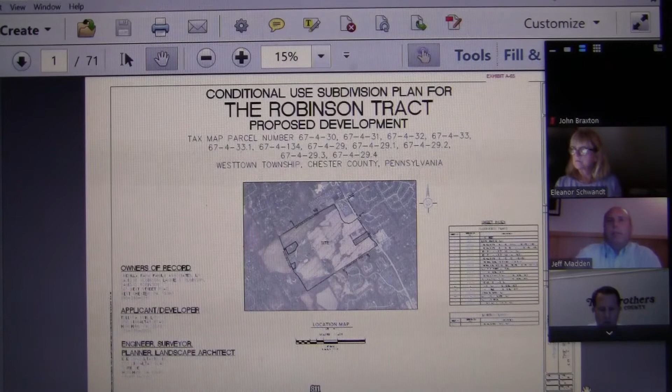Did you also prepare the conditional use application that was submitted with the prior Crebilly farm application? I believe it was marked Exhibit A6. Yes, I did. And that's what's being depicted on the screen at this moment, is that correct? That is correct. Generally, how is the plan now marked as Exhibit A65 different than the prior conditional use site plan A6? The new site plan labeled Exhibit A65 moved one of the site entrances off of 926 to line up with the intersection of Bridlewood Boulevard.

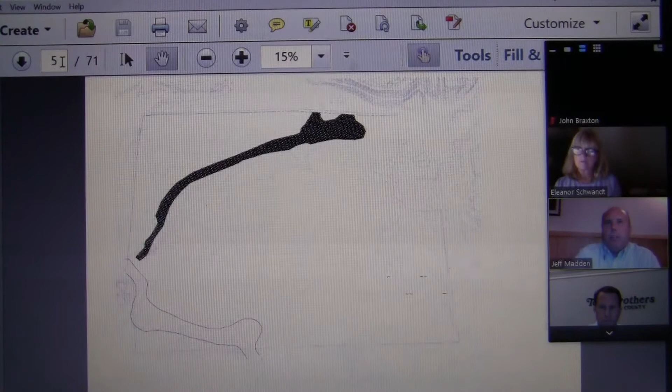It eliminated the right in, right out along 202. The mix was slightly changed. There was previously 117 townhomes, now there's 135. There was previously 127 side entry singles, now there's 118. And there was previously 73 front entry singles, now there's 64. The open space...

...is roughly the same, around 197 acres. There are fewer homes on the westernmost portion of the development property than there was previously. We shifted everything to the right a little bit. One of the major changes was the addition of the collector road, and there is an additional trail located next to the collector road.

Okay, and when you say collector road, where is the road connecting from what road to what road? Sure, it's the spine road that's connecting West Pleasant Grove Road at the top to Street Road at the bottom. Okay, so north to south? Is that correct? That's correct.

Okay, and just generally, again, to refresh everyone's recollection and for the record, where's the property located? It's in the general intersection of the following roads: 202, 926, Street Road, and West Pleasant Grove Road. Okay, and how is the property zoned? The property is zoned AC and R1. And I believe you may have stated this previously, but what's the total approximate acreage of the property? The approximate acreage is 322 acres.

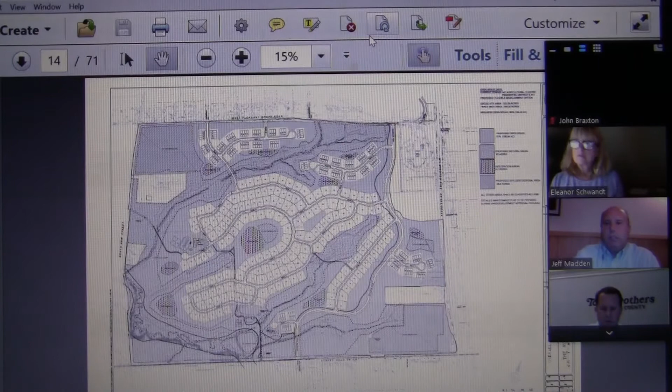Okay, and just some preliminary housekeeping items. I'd like to show you what was previously marked as Exhibit A4, which are the deeds for the property. Take us a moment to pull them up.

And who are the legal owners of the subject property? The Robinson family and related entities. Okay, and I'd like to show you what I've marked as Exhibit A5, or previously marked as Exhibit A5, which is a redacted copy of the agreement of sale for the property.

Is there a question there? Just waiting for it to load. Waiting for the exhibit to load. If you could Sorry. take a moment, please. Sorry. There we go. There it is.

And is Toll purchasing the entire development property? Yes, they are. And what use is Toll proposing to develop on the subject property? Flexible development. And is that flexible development permitted in the AC and R1 zoning districts? Yes, it is by conditional use.

And what is the design process under the ordinance that's required for a flexible development? It's under the conservation design, which is section 170-16-17 of the zoning ordinance. And does that design process require an initial existing natural resources and site analysis? Yes, it does.

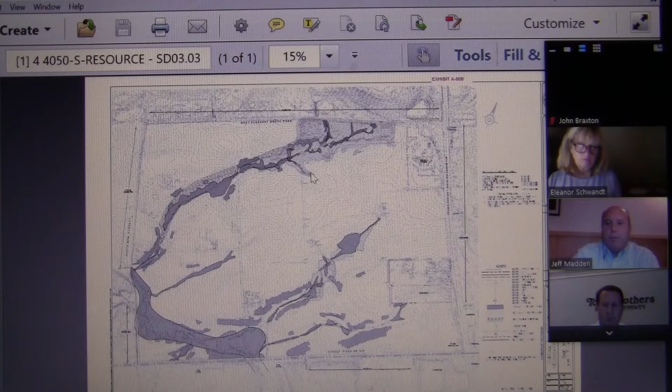I'd like to show you what I've marked as Exhibit A67, which is the potential development area plan sheet from the conditional use plan set. Please explain to the board how the potential development areas are determined.

Sure. The areas shown, which is on plan sheet 9 of the plan set, the brick pattern, which is prominent on this plan, shows the areas that are exclusive of the primary and secondary resources, and that would be the area with the potential development of the area.

They do not include any primary conservation areas, except minor intrusions for land development purposes and otherwise permitted by the Commonwealth, such as road crossings, which we do have in a few locations. We also minimize the intrusion into secondary conservation areas, so there's no more than 50% of the secondary conservation areas, except if modified by the Board of Supervisors.

Okay, and again, what were the intrusions permitted into the primary conservation areas? The primary conservation area intrusions are the road crossings at the site. There's one in the upper left-hand corner that goes across the stream, and another one right across from Bridlewood Boulevard, which would also go across a stream and some slopes.

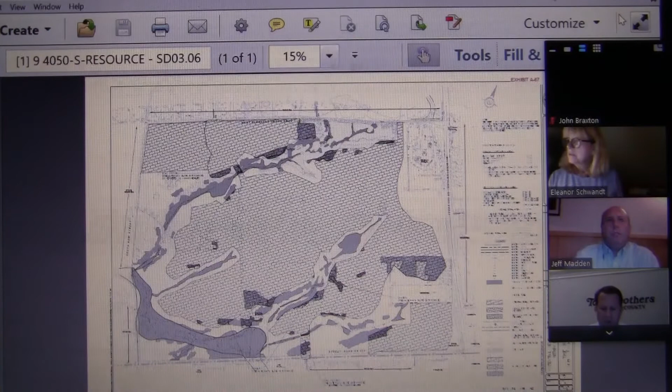I'd like to show you what I've marked as Exhibit A68, which is the overall site plan sheet from the conditional use plan set depicting the proposed development. How many units are proposed here? New units, that is - there are 317 new units.

Okay, and what is the spacing shown on this plan between the townhome buildings? The townhome units on this plan are spaced 60 feet apart from one group of buildings to the next group of buildings.

And how did you lay out this site plan? Using the potential development area concept map, the site was laid out for the roads, the trails, and stormwater areas. The layout was done to try to limit and avoid all the natural resources previously discussed on the primary and secondary conservation maps. So basically you put the development in the areas that are developable from the prior plan sheet, is that correct? That's correct.

Now, looking at the specific details of the proposed flexible development, can you please provide the board with an overview of the specifics, such as accesses, stormwater locations, streets, trails, etc.? Sure, I'll give a brief description of each one. For the accesses, we have an access off of Street Road across from Bridlewood Boulevard.

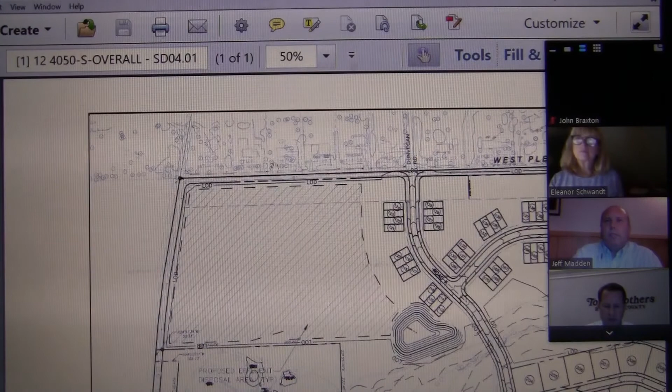What is the maximum net residential density per acre for the townhomes? The townhome density is 10 units per acre. Again, on sheet 12, which is Exhibit A68, there's a chart that shows we have roughly around 7 units per acre provided on the site.

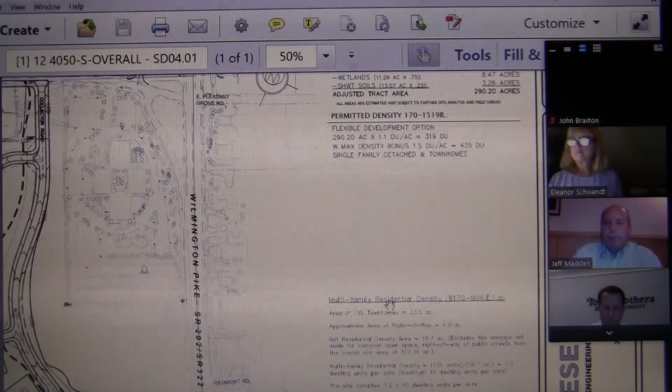Now, turning to the required open space, what percentage of the gross tract area needs to be set aside for the required open space? You need to have 60% of the gross tract area set aside, or roughly on this project 193.4 acres. What plan sheet is that shown on? That's shown on sheet 14 of the plan set, Exhibit A65.

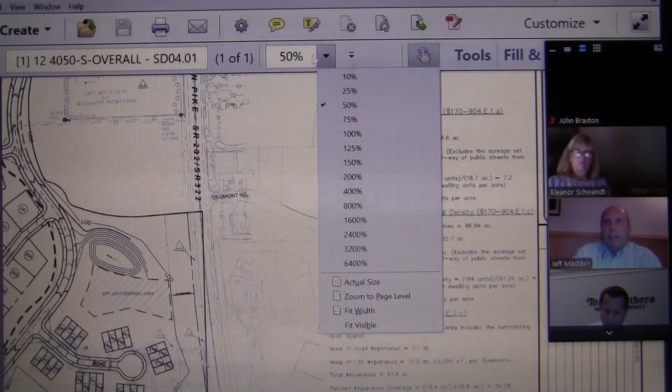Does the plan comply with respect to the required open space? Yes, we do. We show 196.94, roughly 197 acres of open space, also shown on sheet 14 of Exhibit A65. Sheet 14 is from the original conditional use plan set, correct? Correct, A65, yes.

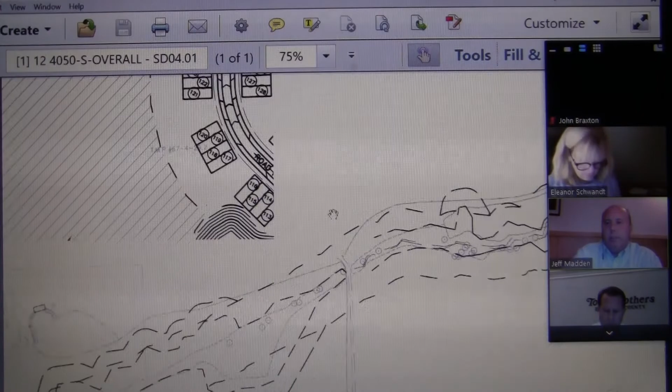What's the maximum impervious coverage permitted under the ordinance? Only the maximum impervious coverage for multifamily is specified, and that is 45% maximum. We have a calculation on sheet 12 of Exhibit A65 which shows 34.5% impervious proposed. Are townhomes included in multifamily? Yes, they are.

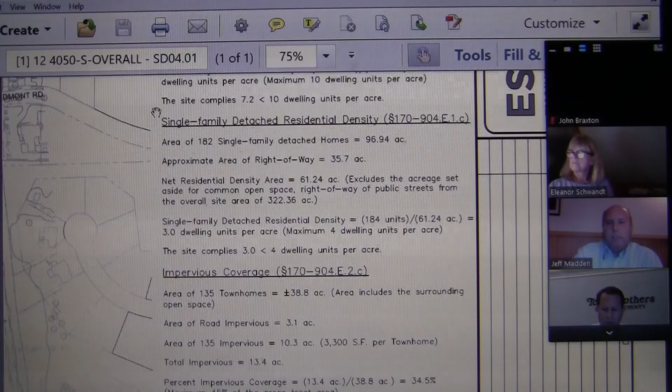Is there a maximum impervious coverage for single-family detached homes? There is not. What is the maximum permitted height? The maximum permitted height is 38 feet. Will all the homes be 38 feet or less in height? Yes, they will.

Does the plan comply with the other dimensional requirements for both single-family detached homes and townhomes? Yes, it does. There's a schematic on sheet 12 of the plan set, part of Exhibit A65, and it complies with section 170-904, E, 10 and 11 for single family, and section 170-904, E, 2, A and B, and 904, E, 10, C for the townhouse or multifamily.

Could Toll reduce the building-to-building setbacks for the townhomes? Yes, that's a possibility under section 170-904, E, 10, D. Did you say D as in David? D as in David or dog, yes.

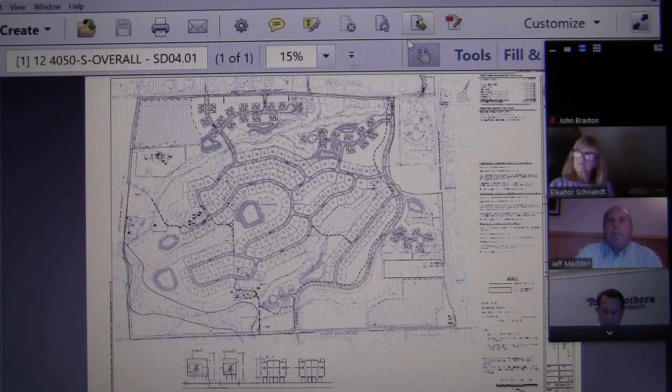I'd like to show you what I've marked as Exhibit A69, which is an alternate plan sheet included in the conditional use plan set. Does this plan show the changed building-to-building setbacks for the townhomes from 60 to 30 feet? Yes, it does.

Will the change in the building-to-building setbacks for townhomes increase the density at all? No, it will not. Does it increase the amount of open space? The open space is roughly the same, but it allows for a more contiguous open space around the property.

Okay, if we go back to Exhibit A65, the conditional use plan set.

Is at least 50% of the open space located outside of floodplain areas, wetland areas, and areas greater than 25% slope? Yes, it is. There is around 197 acres of open space, and the three areas referenced above have a total area of 27.2 acres, so there's definitely less than the 50% open space required.

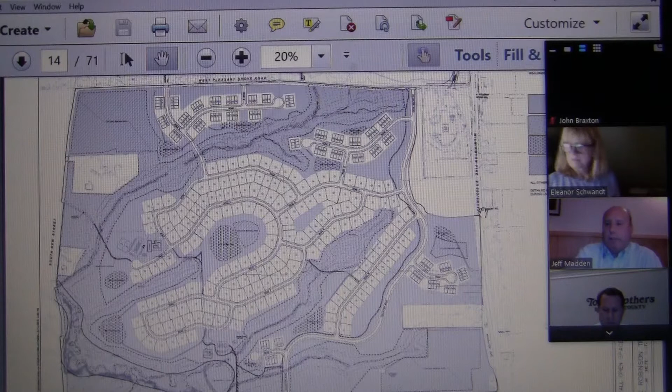How much open space is required to be active recreation per the ordinance? There's 10% required at the discretion of the Board of Supervisors. Does Exhibit A65 show possible active recreational areas satisfying that 10% requirement? Yes, it does. One of the sheets, sheet 50, shows that possible active recreation area.

What trails are proposed to be constructed through the open space areas? There's multiple trails shown on the property in the darker dotted hatch pattern, connecting several roads, with one of the most definitive ones to the west of the collector road, and also spread throughout the project, looping on itself in several locations.

Who will own and maintain the open space? The future association, unless the township wants to accept an offer for dedication.

What type of maintenance will the association conduct for the open space? A planting plan or schedule will be provided, and that would be the maintenance associated with anything on the area. Can you repeat that, you faded out again? Sure, there will be a planting plan or a schedule provided for the maintenance of the area required by the association to maintain.

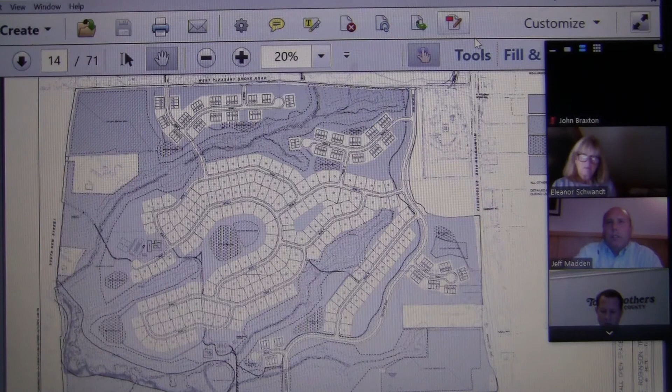Did Aqua Pennsylvania confirm that there's adequate supply to service the proposed development? Yes, they did. I'd like to show you what I've marked as Exhibit A70, which is a letter dated August 19, 2019 from Aqua. Is this Aqua's will-serve letter? Yes, it is.

Did the township review and comment on the proposed conditional use application and plan? Yes, they did. Let's highlight those review letters for the record.

I believe they were already introduced as township exhibits, and I'll go through them. I'd like to show you what was marked as Exhibit B-54, a McCormick and Taylor review letter dated October 3rd, 2019. Is this the township engineer's review letter? Yes, it is.

I'd like to show you what was marked as Exhibits B-56 and 57, which are copies of John Snook's October 3rd and October 17, 2019 letters. Are these the township planner's review letters? Yes, they are.

I'd like to show you what was marked as Exhibit B-59, a copy of the police chief's October 3rd, 2019 review letter. Is that correct? That's correct.